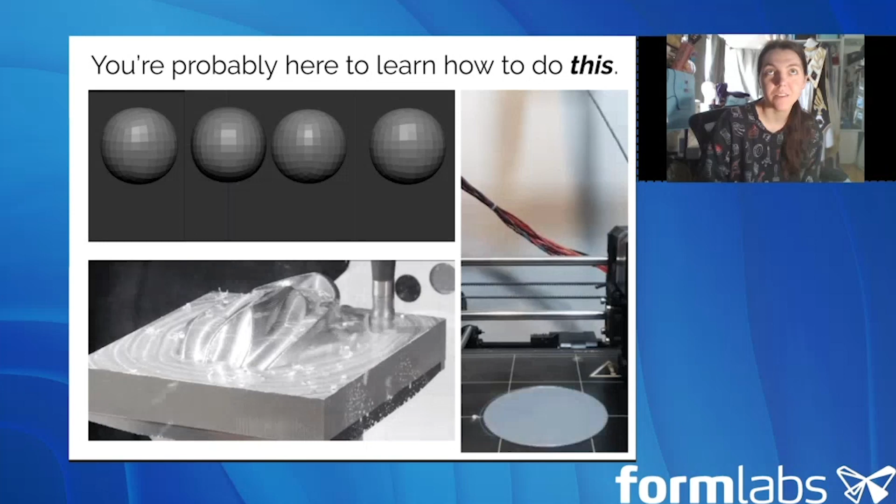So you're probably here listening to this talk because you want to learn to do this. You want to learn to make something from nothing, and in order to do that, you need to make a file before you can actually send it to your printer.

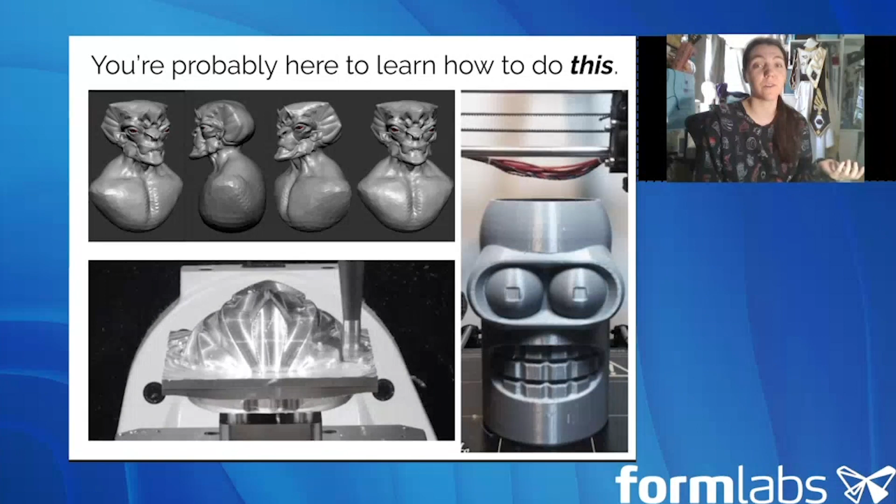You can also use 3D modeling for other things like CNCing, which is why I include that GIF on this slide, because learning to model is useful for a number of general construction applications.

Going through this presentation, we've pretty much done most of our intro. I will walk you through the pre-build preparation, what you need to consider, and for example in my costumes, how I consider wearability for my parts. We will go into breakdown and simplifying shapes, and if you're making something that you need to put on your body, or that needs to work in tandem with a human, say like medical device type things, how to scale that proportionately, at least for a rough first pass.

We'll address DFM and DFA, design for manufacturing and design for assembly, so making something that is greater than the sum of its parts. We will talk about the three main types of CAD, the key operations you can do in a parametric CAD program such as Fusion 360.

I will do a live demo. I say live because this is something that I've recorded in advance and will be narrating over, considering it was about 2.5 hours worth of modeling condensed into 5 minutes for your viewing pleasure.

And we'll wrap it up with just the long story short of, once again, how this is useful for you and your 3D printer. So a couple common definitions for you before we start.

CAD stands for Computer Aided Design, which is basically using a program to help you make a 3D model for an eventual product purpose.

CAM is Computer Aided Machining, which takes that model, writes a series of steps very similar to computer code that can tell a machine what movements it needs to actually make in order to do it. And then 3DP, if I use that abbreviation, is just short for 3D printing. There are a bunch of different kinds, such as FDM, fused deposition modeling, that's like the plastic extrusion you see in the GIF going.

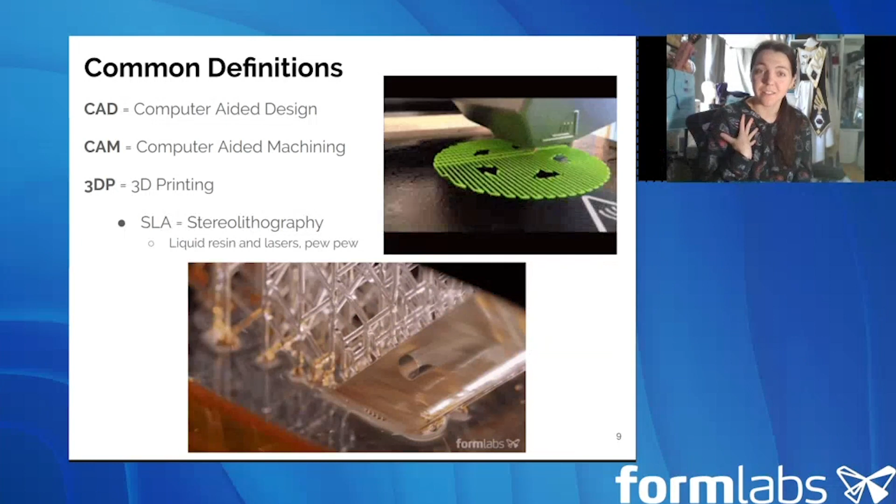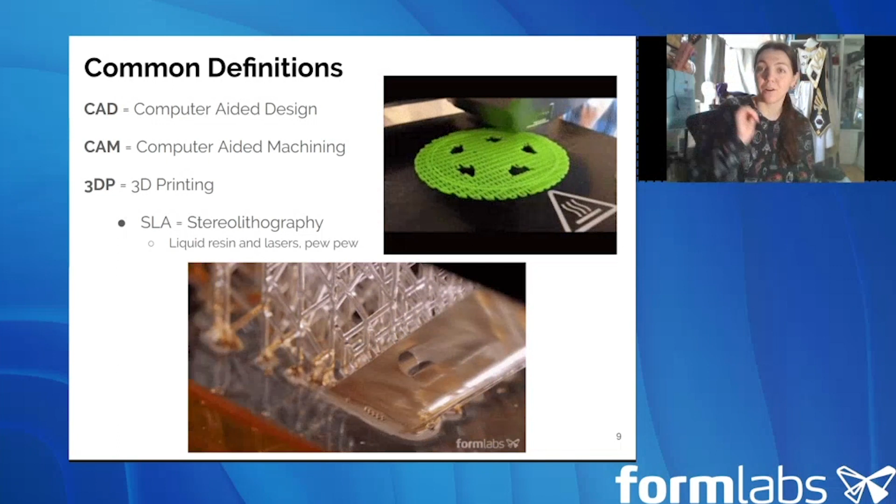If you are familiar with Formlabs, what we do is SLA, where we fire a laser selectively into a vat of resin. It cures, solidifies those particular parts, raises out of the resin, lowers back down, and starts a new layer to build up your part. If you're more interested in understanding how SLA works, visit formlabs.com, there are great videos about how SLA functions. But what you need to do to make your model does not necessarily correlate directly to what the printer itself does on the inside. We make it easy, so all you need to do is load up your file and press go.

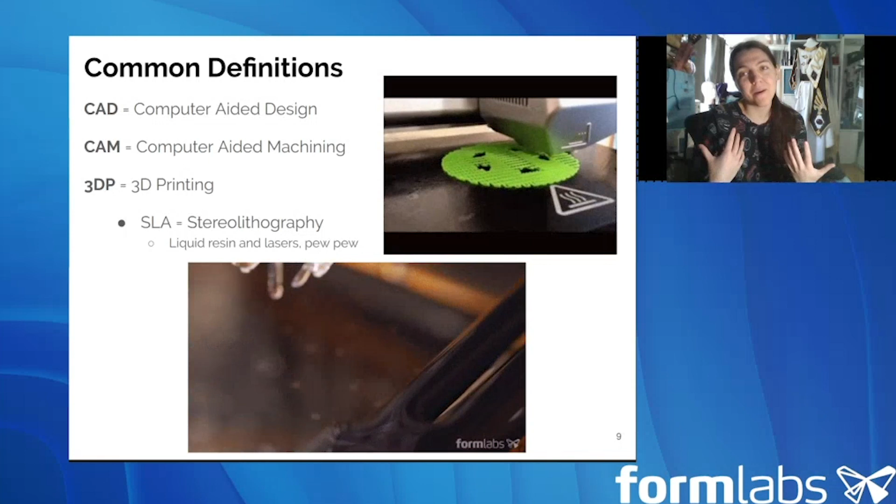To break it down, the first thing you need to do is plan out your design. When I approach costuming, I first collect a lot of references. If you're making something from scratch out of your brain, you'll approach this a little differently, but since I'm trying to do a replica, this is how I do it. I try to get as many views as humanly possible. If I can get 3D character models, concept art, that sort of thing, it's super helpful. I also really like getting animations of things I'm trying to recreate.

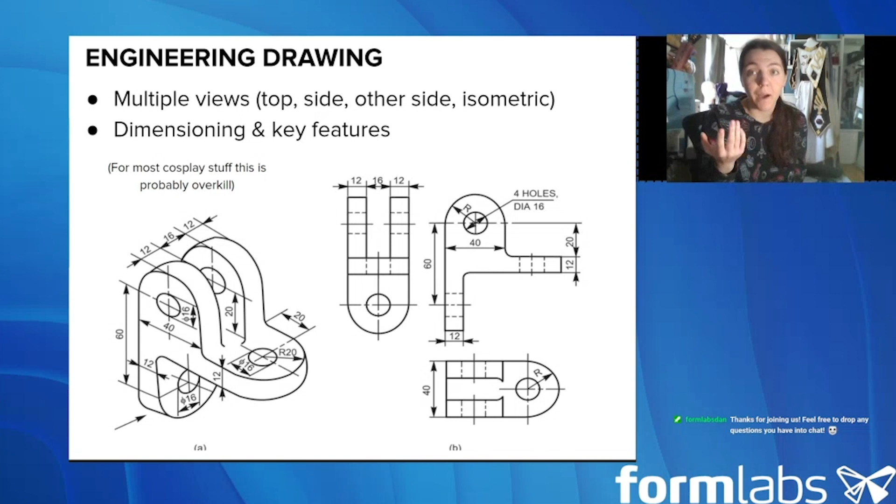Another thing I need to consider, particularly because I'm designing things that people need to wear and hold and look good with in photos compared to a human body, is scaling. I tend to do things like measuring myself and superimposing that onto artworks before I actually get to doing things.

Gridding that bad boy out and being able to scale it is really useful for getting a rough estimate of the size things should be, and that can help put it in perspective. When you're looking at it on a screen, it's very hard to get a sense of how large or small the piece you're actually making is without the ruler telling you. So knowing things like the width of my hand is roughly 4 inches, or that the circumference of my head is 24 inches, can be really helpful for putting designs in context for me personally.

Designing for humans in particular, I generally give this talk at costuming conventions, so I tend to say break things down into simpler shapes. Your wrists and your arms can be broken down into trapezoids, so here to here is a trapezoid that gets wider, whereas if you look at it from this view, my wrist is an oval, the upper part of my arm around the elbow is also an oval. I can basically say ovals, ovals, trapezoids, and combine that into doing my forearm.

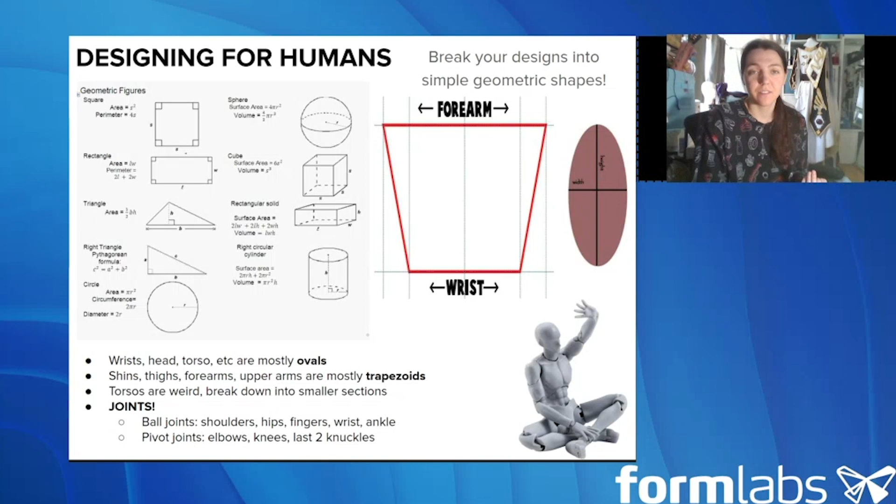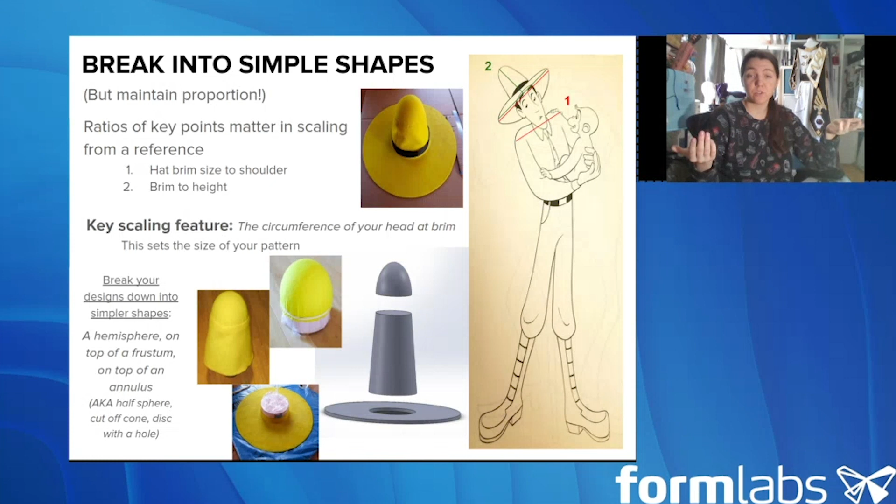Breaking it down into those three pieces made it really easy for Zach to cover this in fabric and then actually wear it.

A more complex example I'm working on is a prop from the game Kingdom Hearts, which we can also break down. Despite that weaponry looking weird and complicated, we can break it into simpler shapes. Starting at the handle, we've got an oval piece with a bar through it, where she's actually grabbing it. We've got two diamond pieces that seem to have holes cut through them, so I can call them overlapping squares in simple terms. I personally would approach them like an octahedron with the top cut off and a hole chunked through it, but that's more complicated than you need on the first pass.

I've got a square rod because I can see that ridge on the top, which tells me it's not round. Then I've got a smaller square rod with another octahedron piece in the middle, and a number of beveled and chamfered cutouts on the piece that's supposed to be the top of the key.

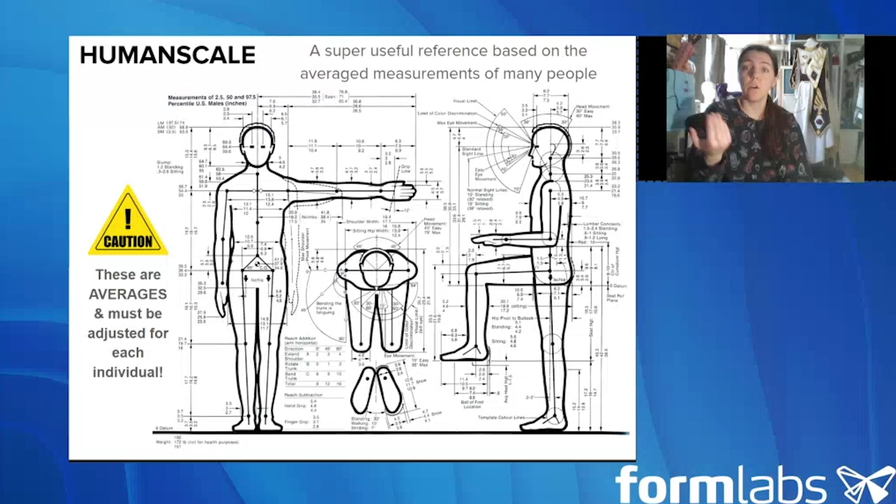Another useful reference, if you're doing something that needs to be human size, is Humanscale. This is a series of averages made by the US military based on soldiers. You can generally use this to get a frame of reference for approximately what sizes you need. This won't necessarily match your own body, but it's at least a good sanity check if you're sizing something that needs to work with a person.

If you don't understand what shapes you need, I like to harken back to a 3D drawing method popular in the costuming community, where you wrap yourself in saran wrap and then duct tape. It sounds silly, but that blue tape thing you see is a copy of my arm. Then I can draw on the pieces I need, cut them out of paper, put them back on my body, and make sure they work. So if you need to figure out how to make something flat go to 3D to understand the shapes, doing some kind of model like that—whether duct tape, saran wrap, or tinfoil—can be really useful.

Now we'll talk about DFM and DFA, which is design for manufacturing and design for assembly. If you're planning your build, you obviously need to start with pieces, but before you start making any one piece, you should sketch out every feature in 2D before you go into 3D. This is referred to as master modeling.

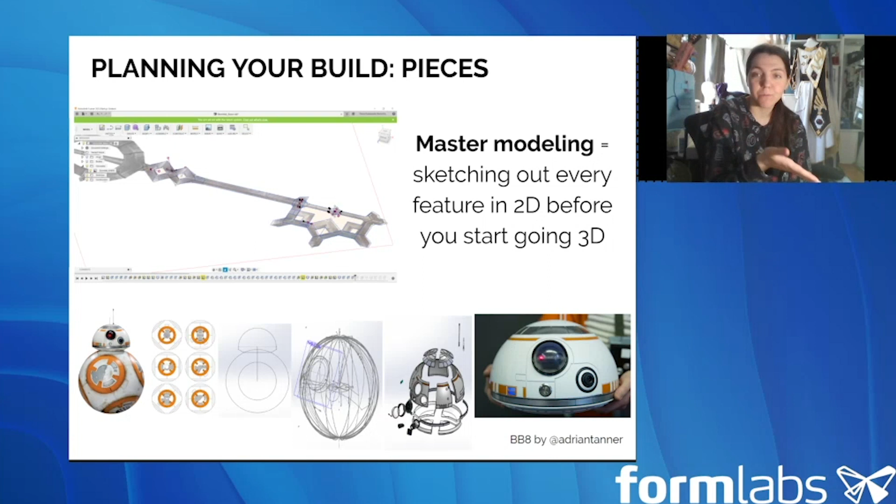We actually have a former intern named Adrian, goes by Adrian Tanner, who made the BB-8 you see on the bottom there. The side view is very simple—just a flattened half sphere for the head, and two spheres for the center, since he made BB-8 hollow. Very simple sketch, but he also drew out all the different views of BB-8's top and bottom piece to make sure the headpiece actually fit together with the bottom. Then he was able to easily chunk that out for 3D printing all the parts, and you get the super cool BB-8 head you see here.

Another thing to consider when building is to use off-the-shelf parts wherever you can. You don't necessarily need to 3D print a plain rod when a wooden dowel or a piece of PVC might do the job. Leave the printing for the more complicated parts that would be near impossible to hand sculpt, or that you couldn't produce cheaply or easily otherwise.

One example is a folding fan I made for one of my Dungeons & Dragons character costumes. If you look closely, the fastener I've got here is a simple eye bolt. The eye bolt lets me put a cord through it so I can put it on my belt, and the screw holds it in nice and tight. This solution was $1, as opposed to having to make something complicated to hold together all of these laser cut pieces.

That leads nicely into connections—how are you going to fit your parts together? I've got an example of a sword carved out of foam, which I put a core through, so you do need to consider mechanical strength. That's another reason to check the mechanical properties on the technical data sheets for whatever resin you might be using to print your parts. Use overlaps to hide your seams, screws, or other connections you don't need. You can hide permanent connections, but make sure you can access connections that need to be able to come apart and break down.

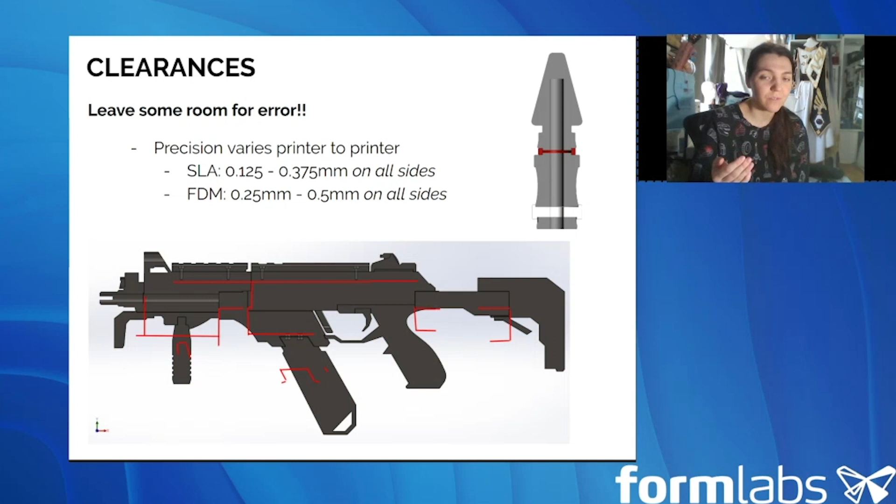I would rather have a part come out slightly undersized than slightly oversized, because there can be fractions of millimeters of variability in your printers. You need to make sure you can actually get those pieces together and attach them by glue, Bondo, or whatever you're using to combine them. You need space for that glue, and if you don't leave space for it, you're going to end up with two pieces that are oversized and don't actually fit together.

Another thing to look at is exploded views and assemblies. An assembly, if you're not familiar, is a series of parts that are put together. You can make a bunch of small parts and then put them together into one part that you can do a nice render out of, or an exploded view.

The wand I've got here on the side is from a show called Little Witch Academia. I've got my super nice, shiny, high gloss render that is what I want it to actually look like when I'm done painting this part. Just to the left, you can see an exploded view showing the top of the wand, the bar that connects it, the top and bottom end caps, and the grip. On the grip there are two little silver parts that aren't visible in the final render - those are the parts that actually slot together, which I will glue down when I finish, although I'll leave one end open with a screw so I can get batteries in there and make this thing light up.

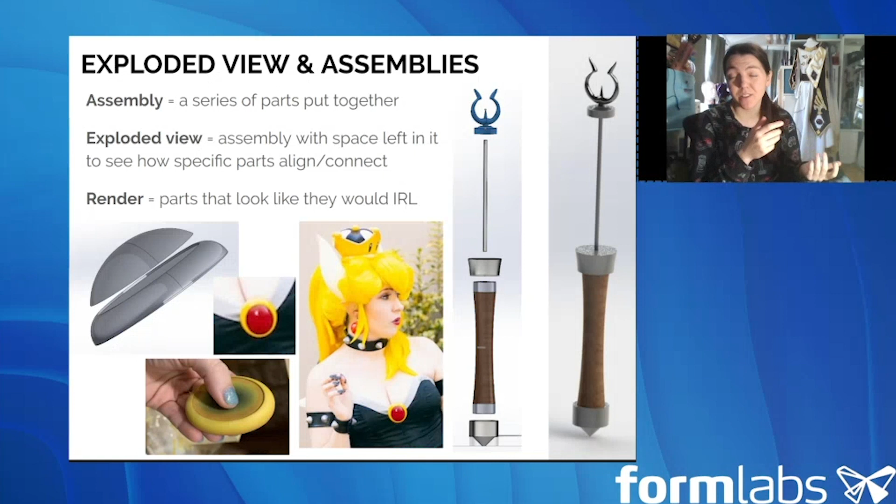I've also got a very simple example with the gem. There's a gem in the backing - that yellow piece painted on the bottom is the backing of the gem that ended up getting mounted on top of a corset piece.

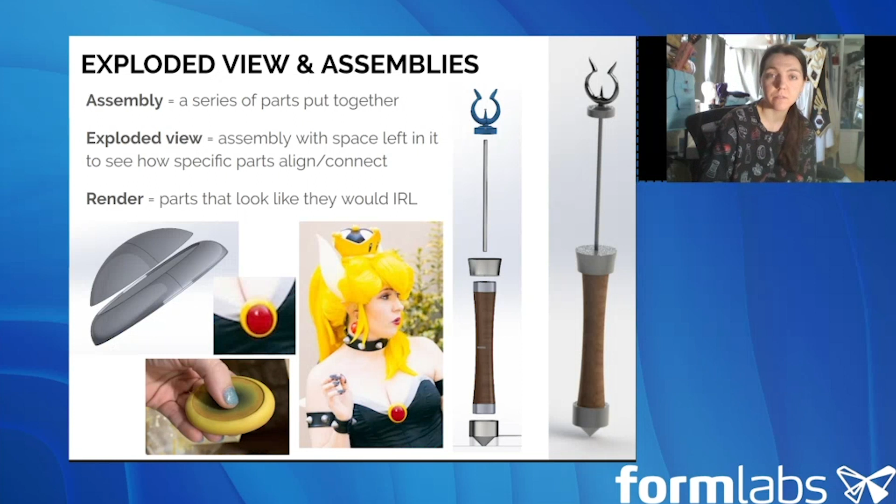There are a couple different types of CAD, and which one you'll want to use really depends on the application of what your final part will be. They are solid and surface modeling, which is often also referred to as parametric modeling. There is mesh modeling, where you manipulate a mesh to get a final shape, and there's also virtual clay. I'll break those down for you right now.

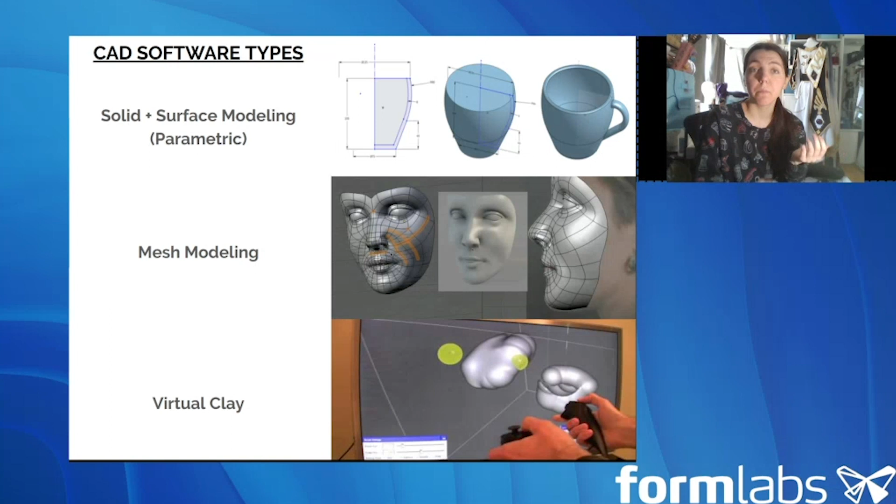Solid modeling - we'll go through a list of programs as well, for example SolidWorks, Onshape, and Rhino 3D. They allow you to define very technical, precise shapes with a lot of dimensions that you can actually measure out and mark on your model. They're really good for mechanical models and machine-like props in my case, but for doing machinery in general, this is probably what you want to be using.

A couple examples of things I've done in parametric programs are the Sheikah Slate from Legend of Zelda: Breath of the Wild. That part needed electronics components in it, a screen that lit up and glowed, so being able to dimension that out and make sure my LEDs all fit was very important for the printing and design process. The Bayard, the weird curvy horseshoe-looking thing, is the weapon from the Voltron show, matching with that white armor I posted earlier.

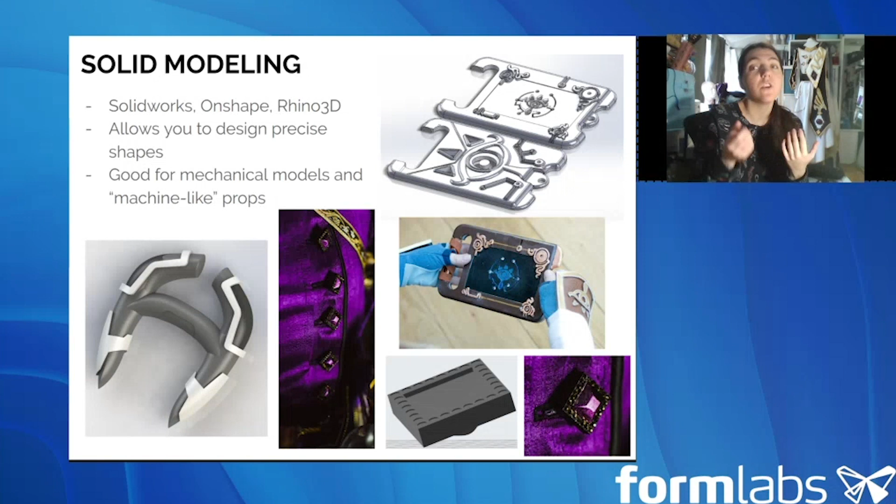Just because I say it's mechanical and machine-like doesn't necessarily mean it has to be blocky. This is a very round shape, but it's still defined by dimensions and done in a parametric software. It's also really good for things you need to design that actually need to hold stresses and strains, for example the buttons on my coat. The black model is the base, and then I inset a series of purple and gold gems into it, hence all the cavities. I needed those cavities to fit gems I already had that came in a set size, so I could dimension that out in the model, print it, and know it would be a perfect fit every single time.

Surface modeling is related to solid modeling. It's on the computer - it's joined surfaces that are practically the same as a solid. I'll use my Girl Scout cookie box here as an example of that.

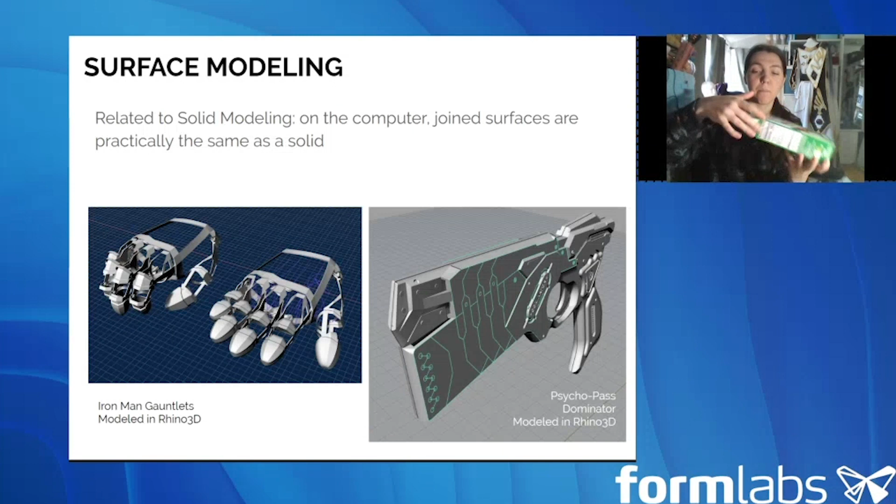This is a flat piece of cardboard. I've got all my tabs that are flat pieces of cardboard. When they join together, I get a single flat surface.

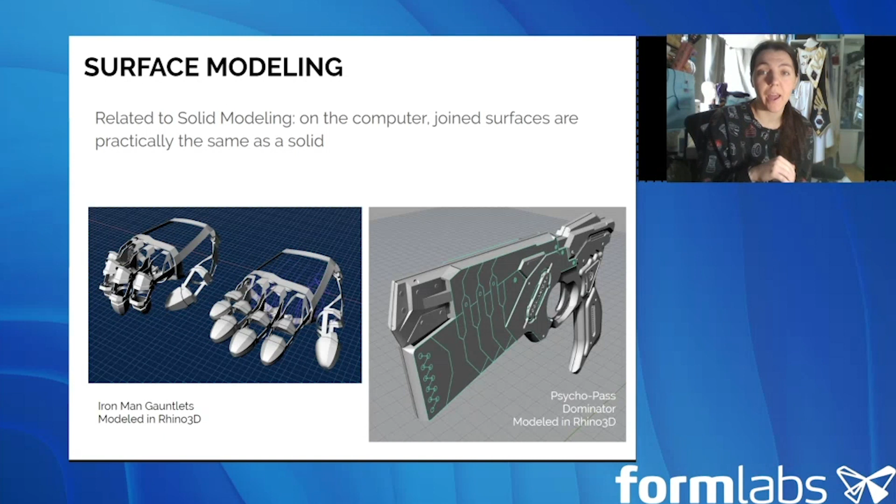The examples I've got here for this one are modeled by Brian Shannon, who was another Formlabs employee working on our design teams. These are his Iron Man gauntlets and also a pistol from the show Psycho-Pass.

Virtual clay is probably most like the normal sculpting that you're used to. So there's Sculptris and ZBrush as 2 examples. I recommend Sculptris for newbies who want to just play around and give it a shot because you can try that program for free. It is the least precise of the 3D modeling softwares because you don't really define any dimensions to a measurement, but you can do nice organic shapes as if you are actually working with clay in the world with your hands.

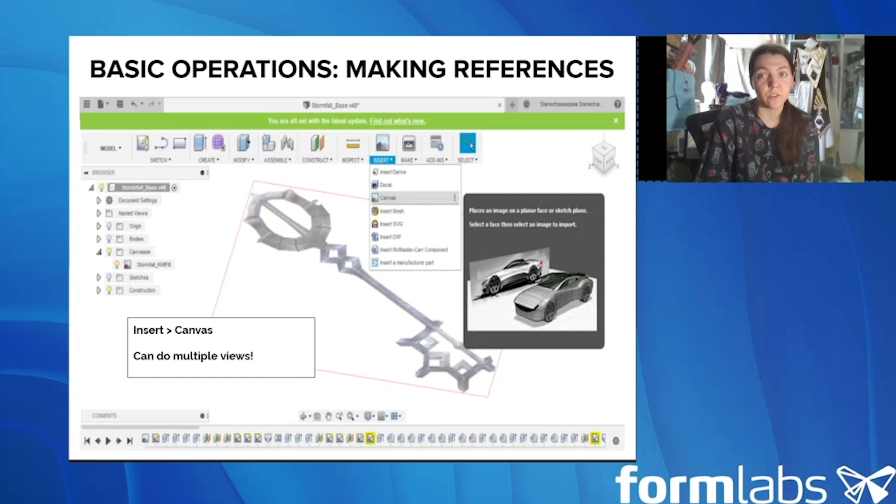An example of making references.

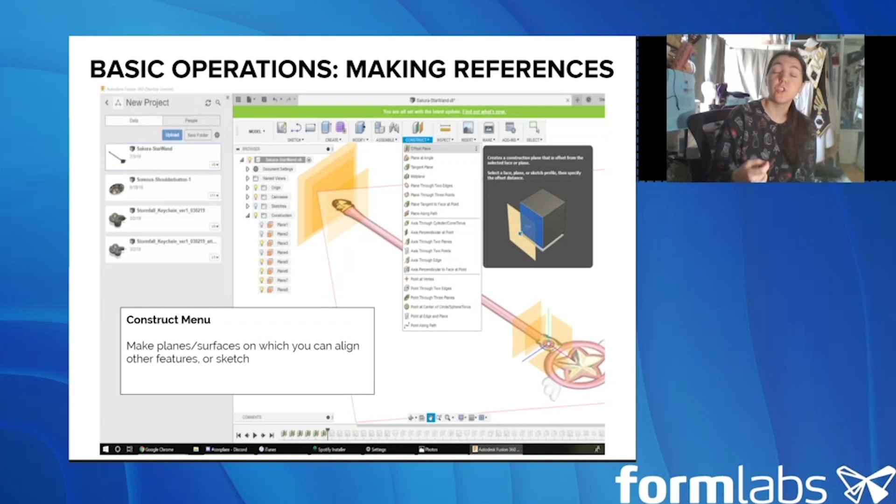Then what you have to do is construct. You need to start making the planes or surfaces on which you can align your other features or sketches. So in order to draw something, you need a piece of paper, and that's what I like to liken the planes in any CAD software to. You need to define a plane, or define your sheet of paper, on which you can make the sketch or the lines that you're actually going to use to make something 3D.

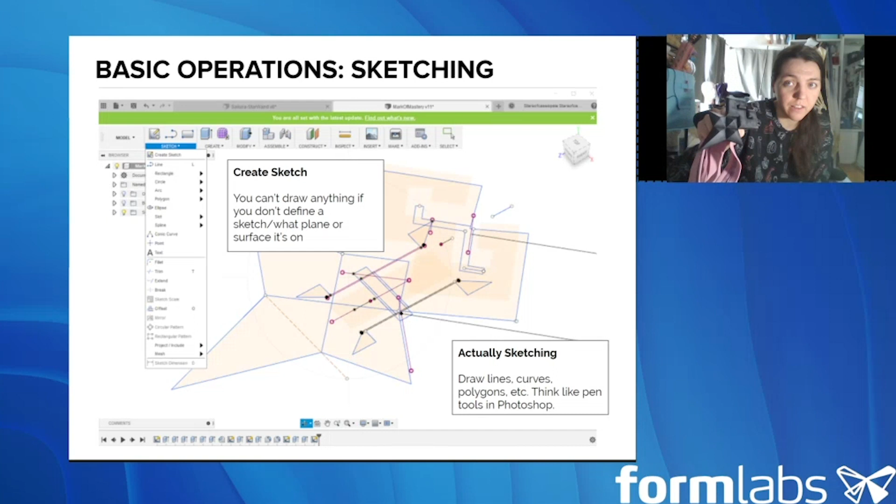Sketching is where you actually draw out those lines, so you go create sketch on whatever surface that you've chosen as your drawing plane, and then you can actually draw out the lines. So the sketch you see on screen here is the basic outline of those straps that I showed earlier. That sketch is what this piece looks like, laid out roughly like this, before I made any of this 3D.

Basic operations. Now that you've got your sketch, you can actually start making this something solid. The first thing you can do is extruding. It's like a prism. You start with one face and extend it straight up into an actual shape. So that part is this top piece here.

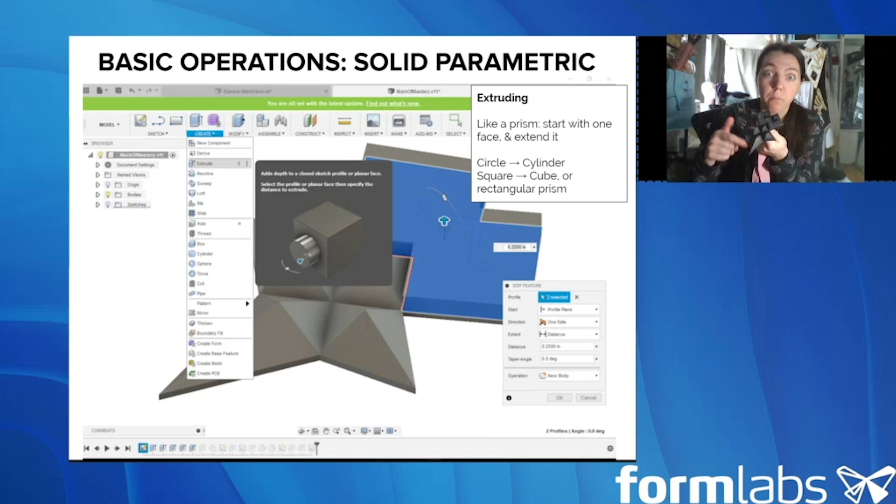You can also extrude things at angles, which is how I got these more pyramidal shapes on the bottom part of the Mark of Mastery. So if you drag a circle sketch out, you'll get a cylinder. If you drag a square, you'll get a cube or rectangular prism, depending on how high you make that piece.

There's also revolving, which is taking a shape and revolving it around an axis. Something like my water bottle is a really good example of that. I can sketch out this curve right here, revolve it around a center axis, and get something that is perfectly symmetrical.

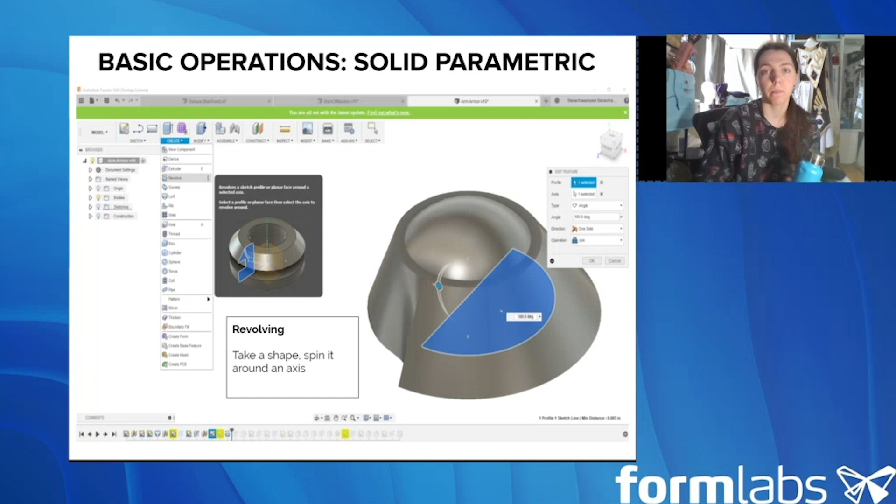There's also a method called lofting, and I really like the example that Fusion gives you in their hover-over. Another nice thing I like about Fusion for beginners is that when you hover over the actions in the menu itself, it'll give you an example of what that looks like.

Lofting is where you take a shape and extrude it up to another shape. The shape I've got here is actually part of the same armor set that this piece was from. It's a weird swervy bit on the bottom that comes up to a simple disc where a gem gets mounted on top. I did this as a loft because I have a complex shape that goes into a much simpler shape, and I want it all to taper nicely.

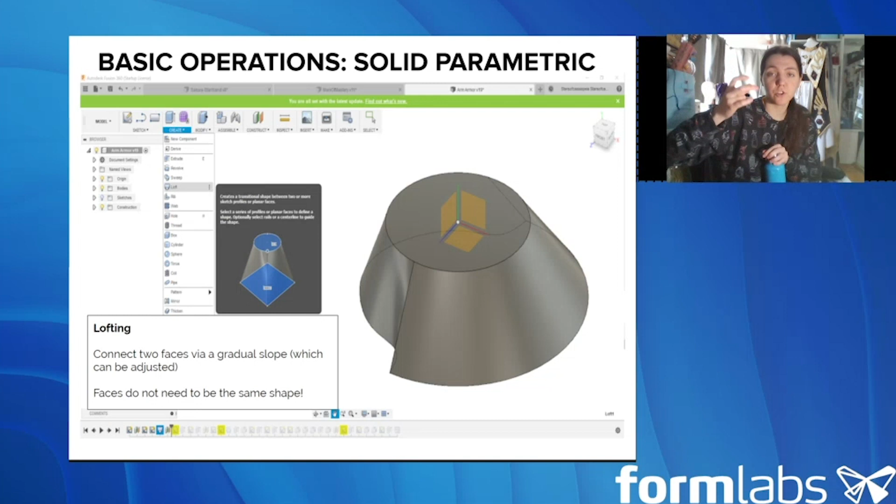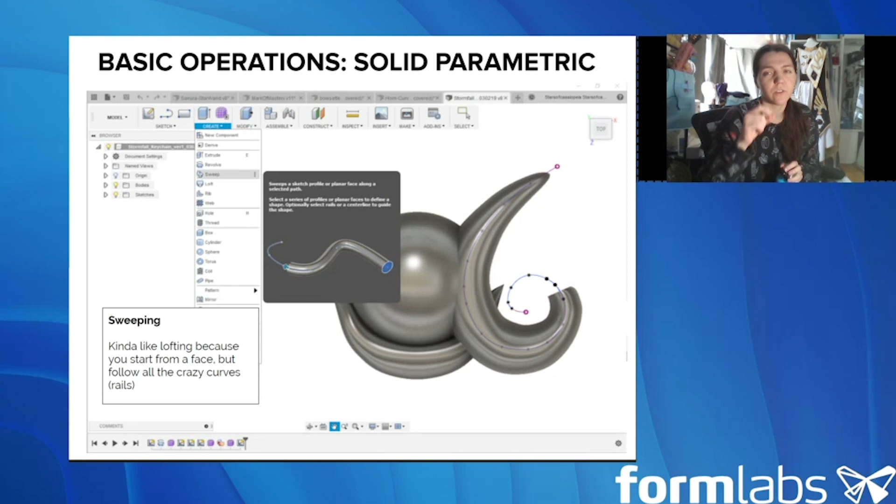Another option you've got is called sweeping, which is where you draw a curve and then drag a shape along that curve. That's how I started with the spiral part of the side of that piece. I had a circular curve that I dragged along that spiral, and you can get basically a tube that bends and wiggles and does all kinds of meandering. But you can also do this with a square, so you can get like a square pipe as well. Pipe is a good way to think about it.

And then for Fusion, we've once again also got mesh. So mesh manipulations, you start with a block that only has a handful of faces. You manipulate the faces, the vertices, and the edges of this block in order to shape it into something more complicated.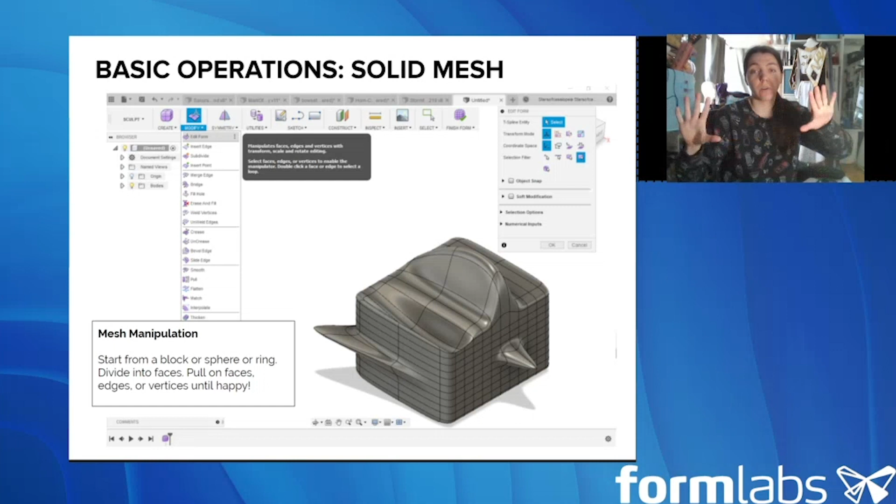Since all of the other mesh is defined as being flat until I start manipulating it, it's much easier to work big and then go down and refine into the tiny details when you're working with mesh in particular.

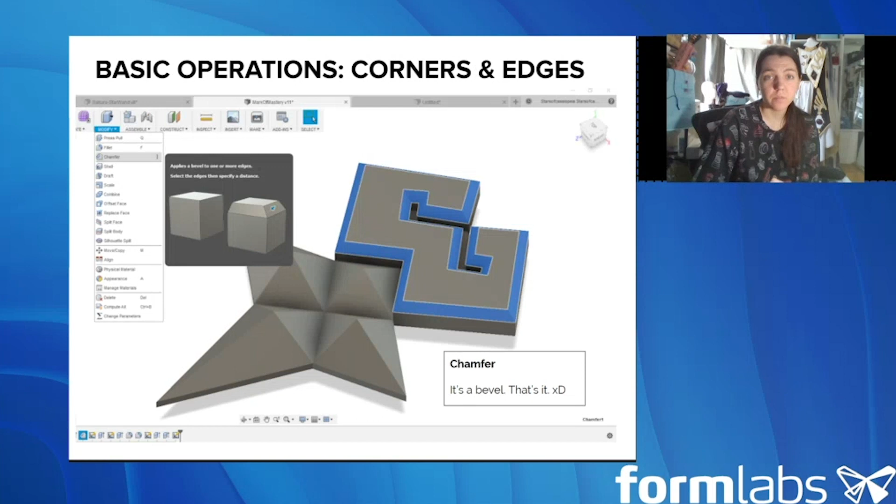Some other basic operations: corners and edges. The tool called chamfering makes a bevel, and that's pretty much it. You can see it really nicely on that piece — it gives a very nice finish on the edges of the top.

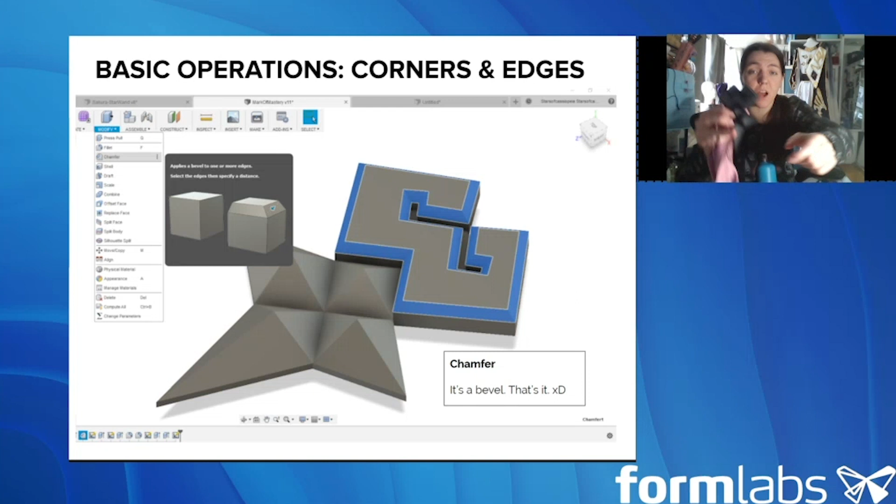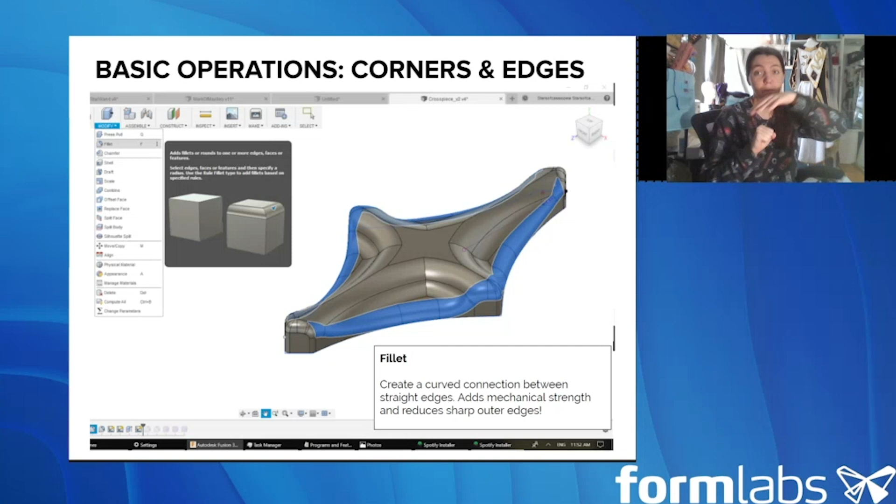You've also got an option called filleting. Filleting is basically like putting a curve between a 90-degree angle. I like to use the L of my thumb as a good example: when my fingers come together at a perpendicular right angle, that part of skin makes a nice little curve and smooths things out. It also adds mechanical strength to parts that may just be blocks stacked on top of each other, which can be really useful for printing and also making sure things fit.

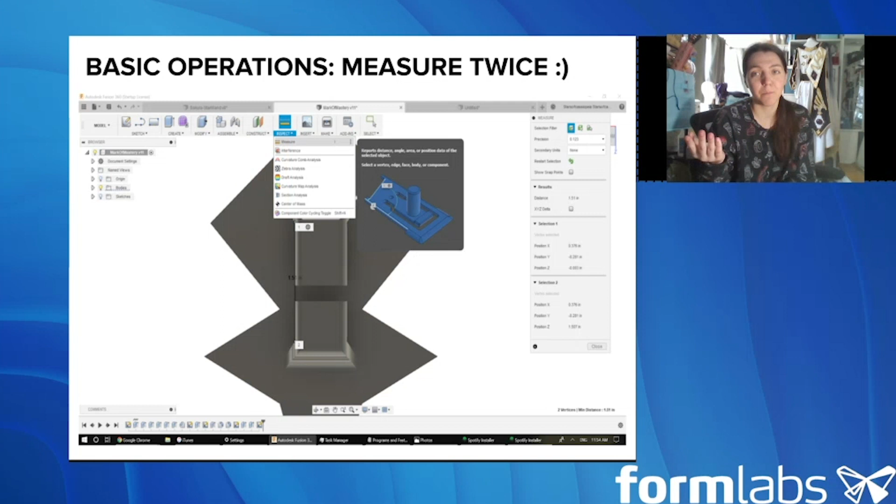Other basic operations: always measure when you're doing things. For me in particular, because I often deal with things that need to be human-scaled pieces, you can use the ruler tool to double check your measurements of any of your parts before you go and print something, and hopefully don't get the wrong size by doing your checks.

So the live demo I'll be doing is from one of my favorite cartoons as a kid, Cardcaptor Sakura, and the magic wand that she uses to fight all of the magical entities that appear in her world.

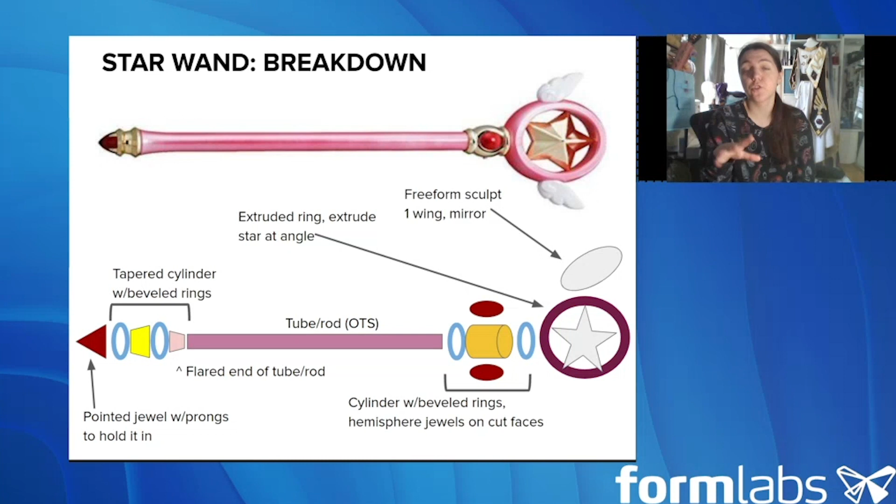Cool, so now we will play the demo of the Star Wand. This is at 10 times speed from what I modeled. It was about a 2.5 hour modeling process when I did it from scratch, and I would also like to say this is a fairly messy model because I was trying to do it for speed. I have a couple things that I will talk about, like where I would improve this if I was doing something really, really particular. But to mock up something quick, you can get something relatively fast that might look way more complicated than it actually is.

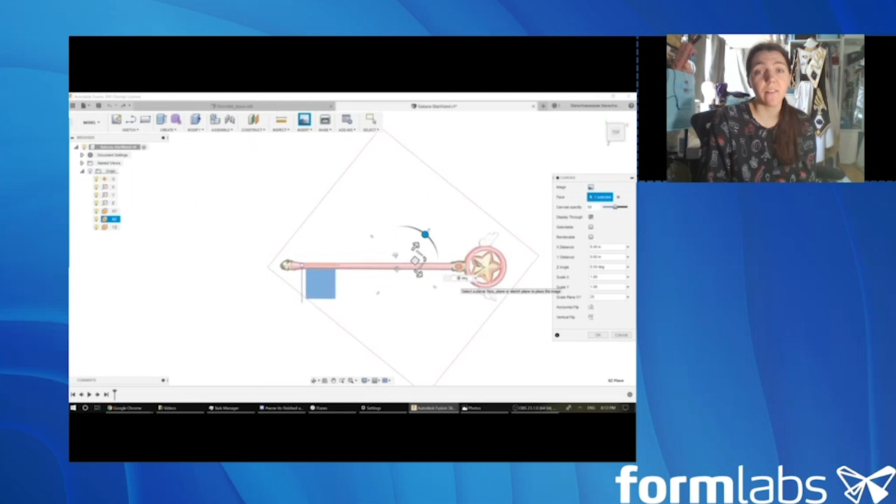So let's get the screen video going. Cool, so here we are starting out in Fusion 360. I am starting out by putting in my reference image, which I am then scaling to be actually my size, and I've spent a lot of time also trying to align it with the origin point that Fusion predefines for you.

If you align it with that, then I can do things like make symmetry from the planes, and I only have to draw half of things. For example, I can draw 1 wing and just mirror it over the middle plane.

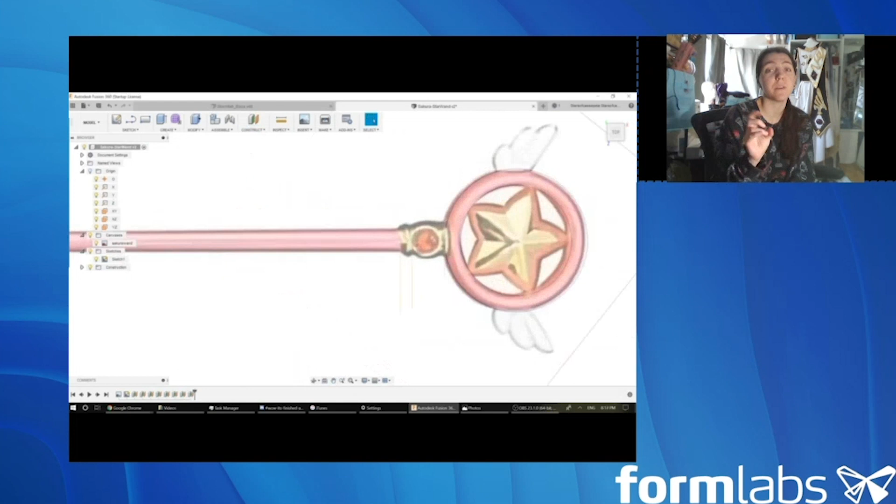What I'm doing right now is I am making those additional planes, so I'm defining where all of the tops and bottoms of those ring pieces need to be, where the flares start and stop on the handle, how all these pieces actually will fit together.

Right now I'm drawing these circles for the ring itself to make sure that it actually matches up with the prop. I'm a little bit off of the exact reference, but I wanted something that was going to look proportionally nice, so I generally tend to give myself a little bit of creative freedom when I'm drawing that out there.

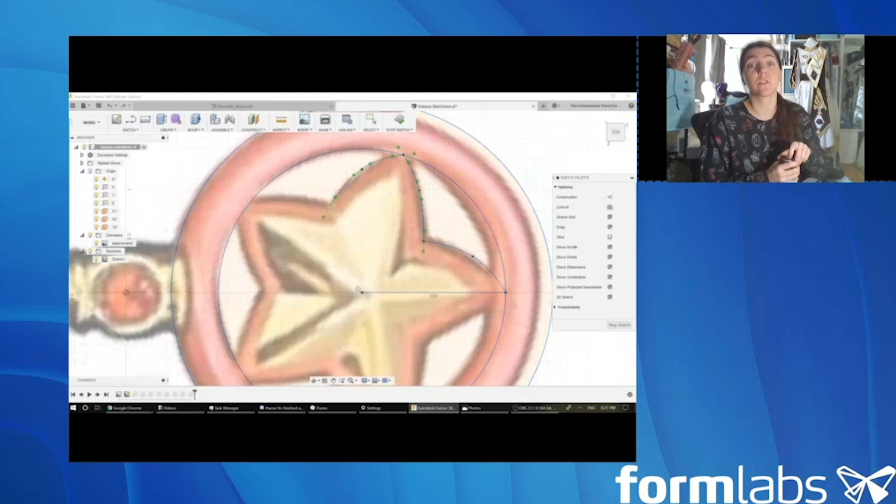What I'm doing right now is I'm drawing the curves for the star. I actually, in retrospect, this is one of the parts that I would have changed. This is quick and dirty because I wanted to show you how to use the actual freeform sketch tool with splines. Splines are lines that you can manipulate by pulling on certain points. It's very similar to the pen tool in Photoshop.

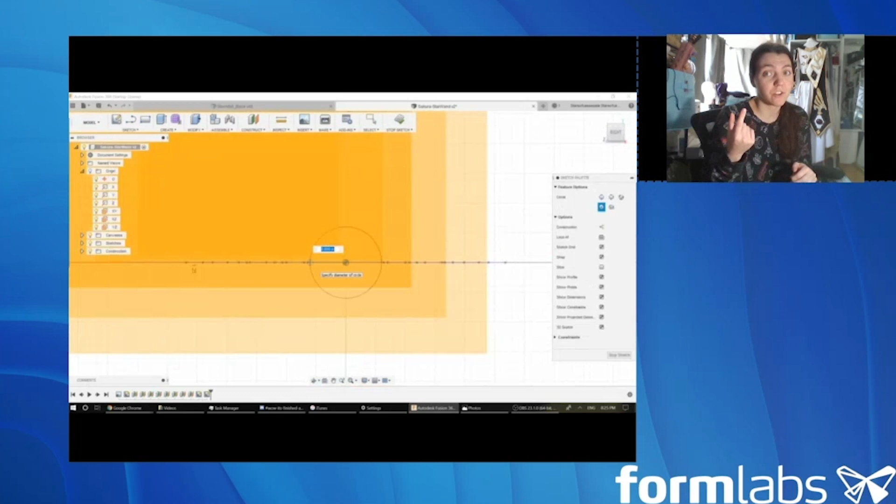What I would have done if I could redo this model is I would probably just draw 1 point and then use a symmetric rotation to make sure my 5 points were identical. So that part will look a little bit off in this sketch, but like I said, I wanted to show off how to use splines in the sketch where I really wouldn't get to do much of that otherwise.

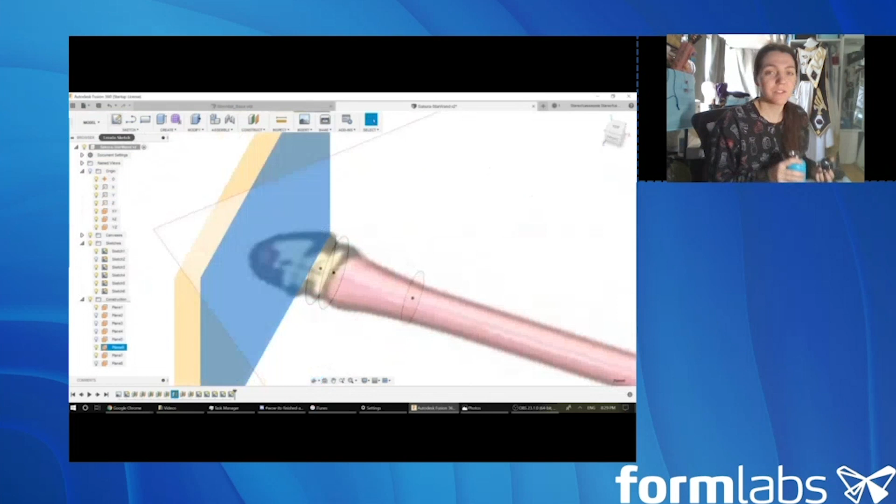So I'm back here defining my planes for the bottom of this prop. I'm drawing out my circles for the rod such that I can actually do things like lofts and extrusions to get them to all fit together. And we're just drawing a lot more planes and circles for a bit, so I'll grab a sip of water.

More planes, more circles. You spend a lot of time just defining your planes and your circles, defining your planes and your sketches before you ever get to actually making something in 3D. So this is our master modeling stage that I mentioned earlier. Lots more planes as we go, and I think we will soon start actually making things 3D.

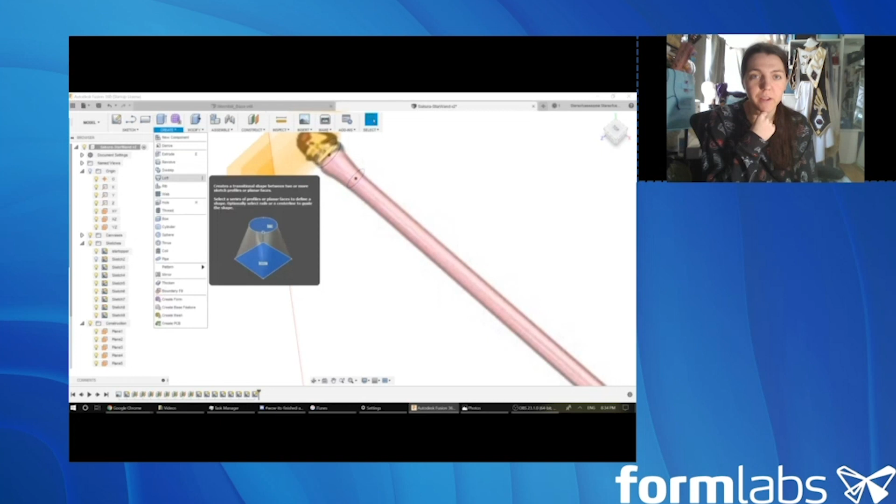Here we go. Yes, so this is an example of a loft where I'm doing that tapered part. So that's the bottom of the rod grip itself. Then I just extrude the rest of that tube up because it doesn't need to be anything fancy, it's just a plain cylinder. This is an extrusion of the top of the ring.

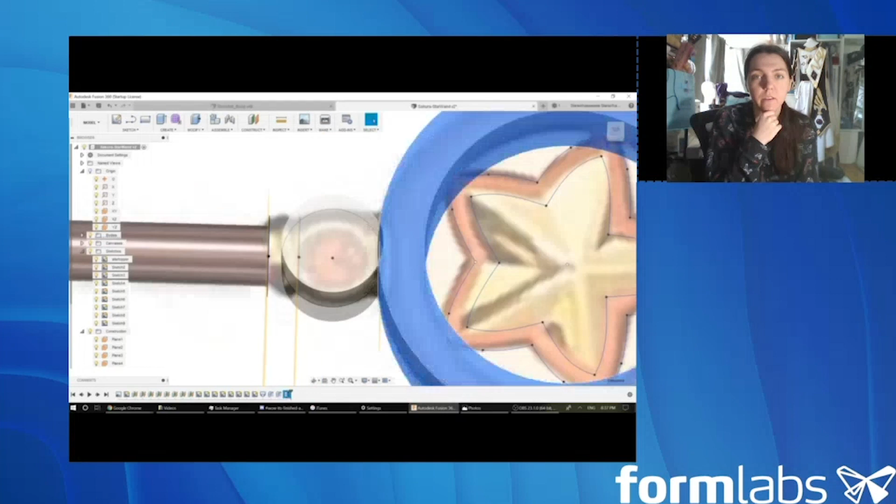I've also mirrored it over the bottom plane because the top and the bottom of the ring are the same, so I've just drawn the first half and drawn the second half in the other direction. Then I'm working on the grip portion, or the top connector grip portion of this. So I'm starting there to make that ring that needs to go out. You can see how I did that flare by extruding it at an angle. Did another one of those to line up with it.

Then I make sure that those pieces have actually connected together so that Fusion will treat it as one solid body when I go to print it, as opposed to a couple of different pieces that float. Because I will need to refine how those connections fit together, and if Fusion doesn't acknowledge them as one solid part, I won't be able to do that.

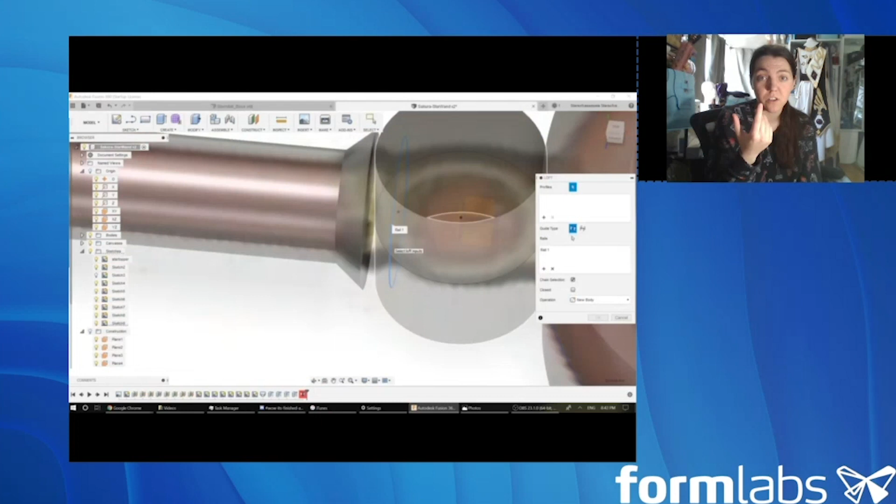There's our other beveled ring as it goes. Tweaking that connection to make sure it actually fits right.

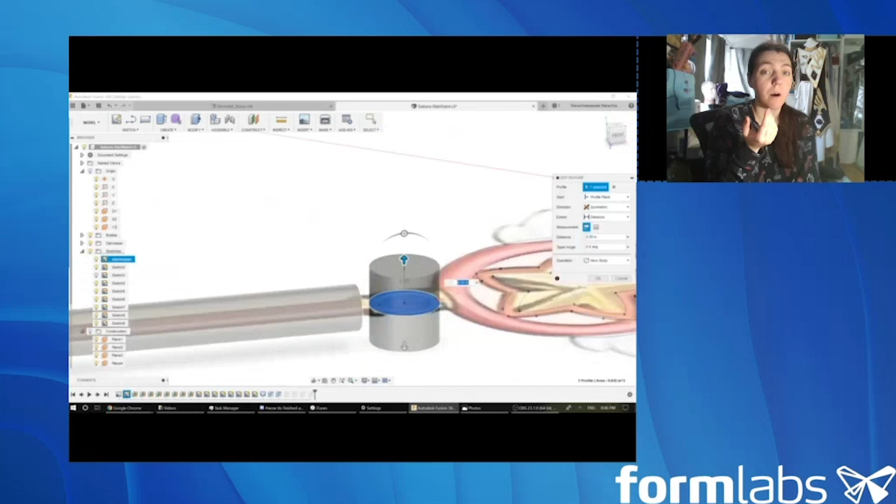Another thing I'll mention is that if I was actually designing this prop, I would probably make it collapse. This part is modeled entirely in one solid piece, but I would probably split it into a couple different pieces. I'd make that end cap, that little gem part we're working on right now, one piece. I'd make the rod grip another piece, and the top of the staff different, and have them either just fit together with a press fit, or some kind of screw point at that section, so I can disassemble it and put it in my suitcase and take it with me to whatever event I'm going to. But this prop is also fairly small, so I could just do it in one piece.

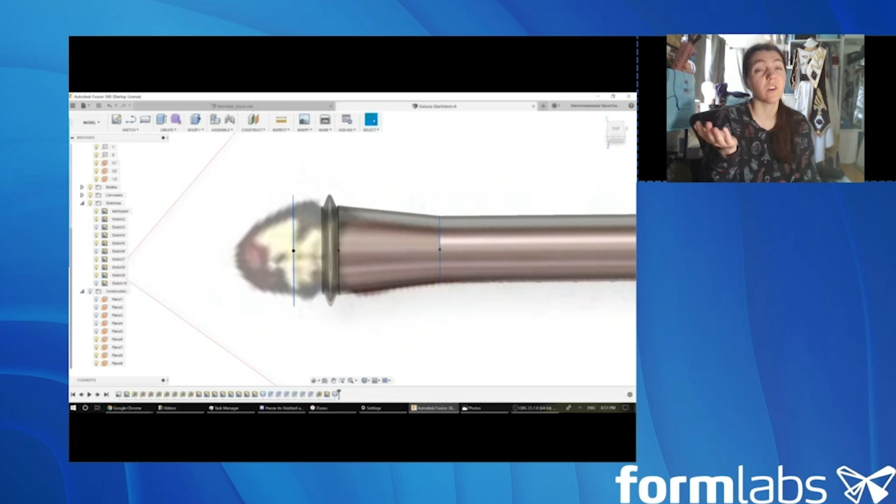What you'll need to do is break up your parts if you're doing particularly large parts, to fit inside your printer. If you're doing small stuff, it doesn't really apply to you. But knowing how to break things up to actually fit them in your printer is important. Like I said, this is where you do your sectioning off and do your tolerancing, such as what I mentioned earlier in the DFM and DFA portions of the slide.

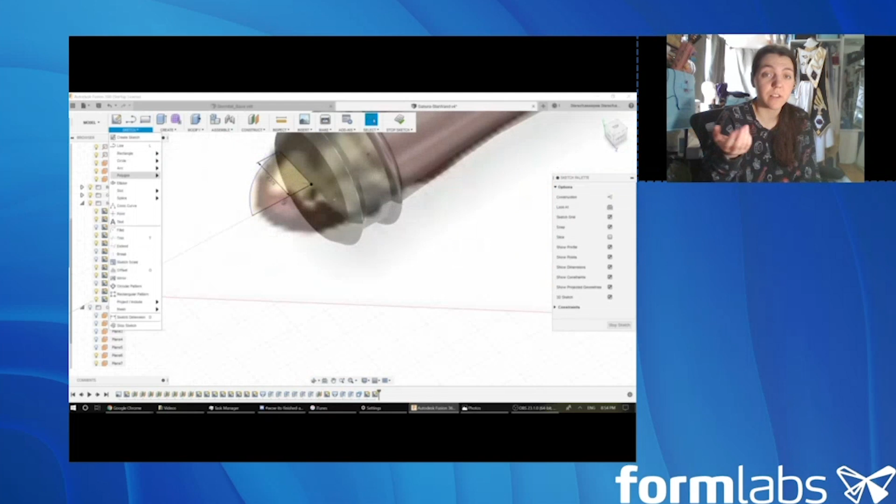This is an example of the revolve. I drew kind of just like a curvy part on roughly a quarter of a circle, more like a quarter of an oval, and then revolved it around to get that.

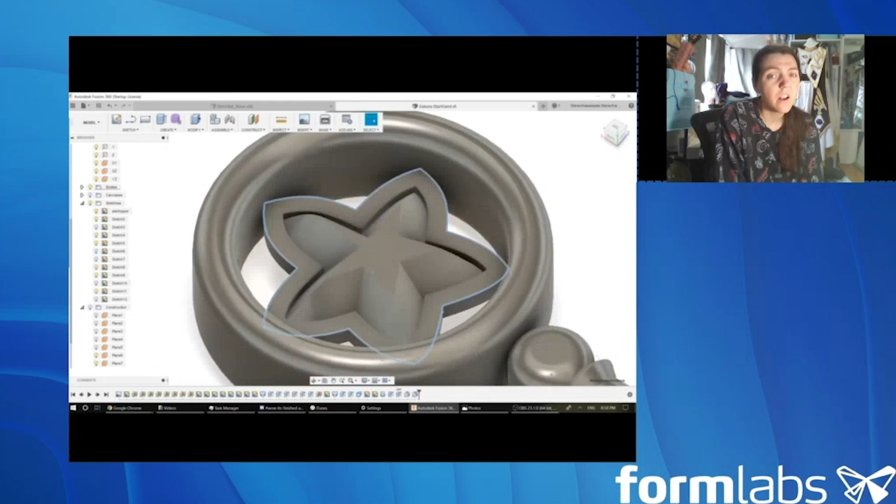That is our extrusion of the star. Like I said, it's not quite as neat as I would have liked, because I would have liked to do that with a symmetrical sketch as opposed to just the quick and dirty curvy bit I did here. That's one part I would refine if I was going back and doing this for real. And then I'm using the fillet tool here to smooth out a lot of those edges so they're not sharp and harsh. I want this to be rounded because Sakura is cute, and a lot of her props are not very sharp or harsh or rigid, so I wanted to make this a smoother, cuter part.

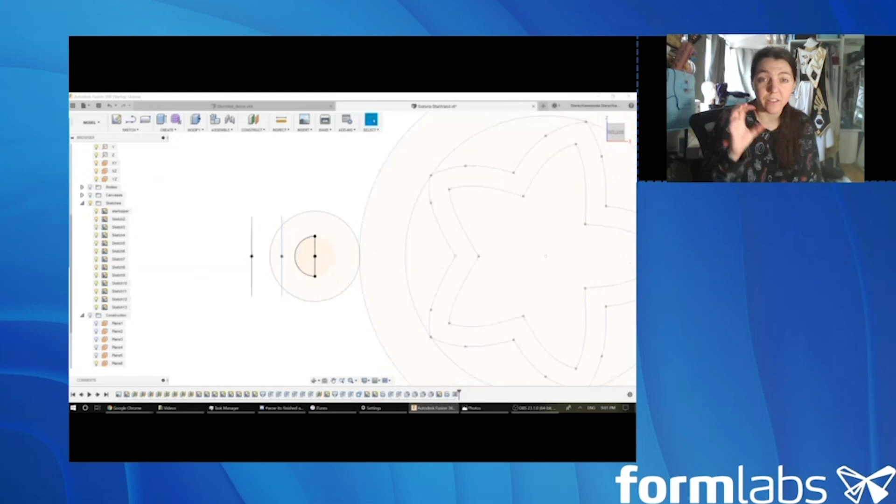That is another example of the revolve where I did the little red gem piece. That's a 180 revolve of a half circle, so it's just from here to here. Then I have to make that connection to make sure it actually connects up to the big ring itself. That's what I'm doing right now.

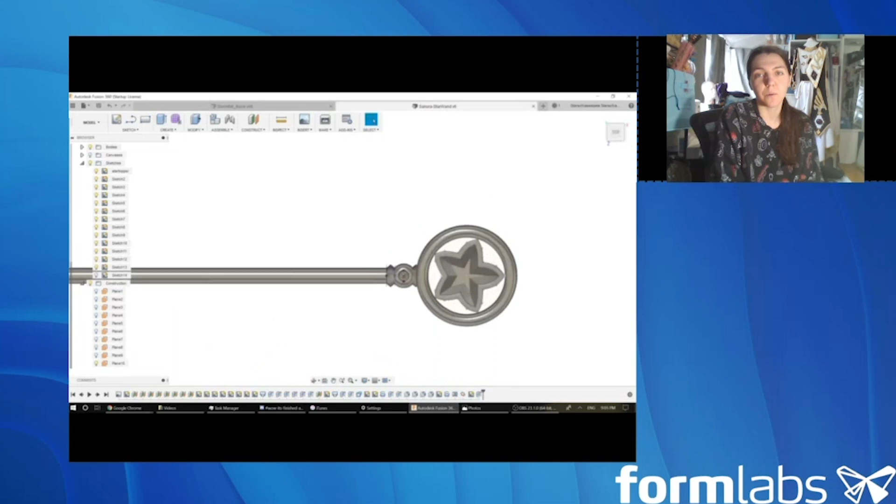There we go. Now we start off on the wings. I brought my reference image back, and then we are going to start working in a mesh for particulars. This is the spline tool once again, where I'm drawing out the outline of those wings.

Then I make an extrusion with the spline. You see I've got that overlap there. That's a problem, so I have to go back in and adjust it. Meshes are not happy generally when you've got lines that intersect each other.

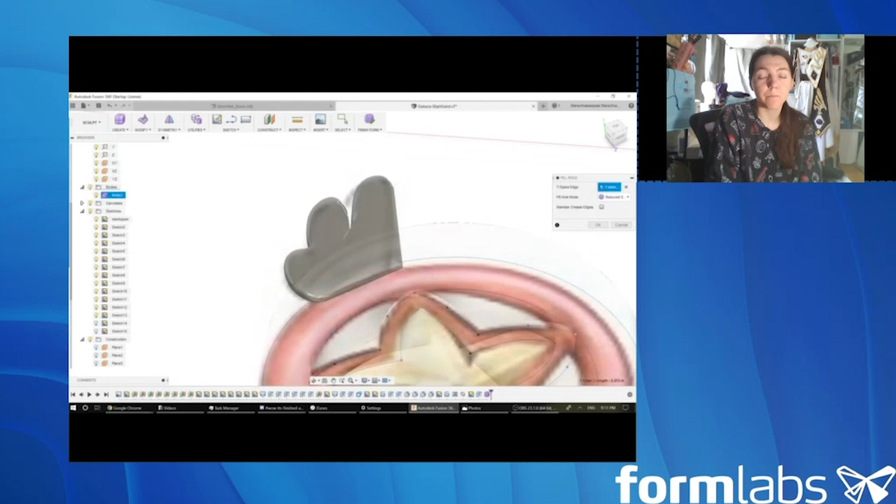So I've now made my wing border, which I fill in and start manipulating to get something that I'm happier with. What I wasn't a huge fan of is how that weird cut was happening because of the way the corner was aligning on the mesh.

So what I ended up doing, and you'll see that here in a second, is I split up the wings into 3 different sections: the tiny little bump, the middle bump, and the large bump, and then combined them such that the combination points weren't giving me bizarre, weird curves.

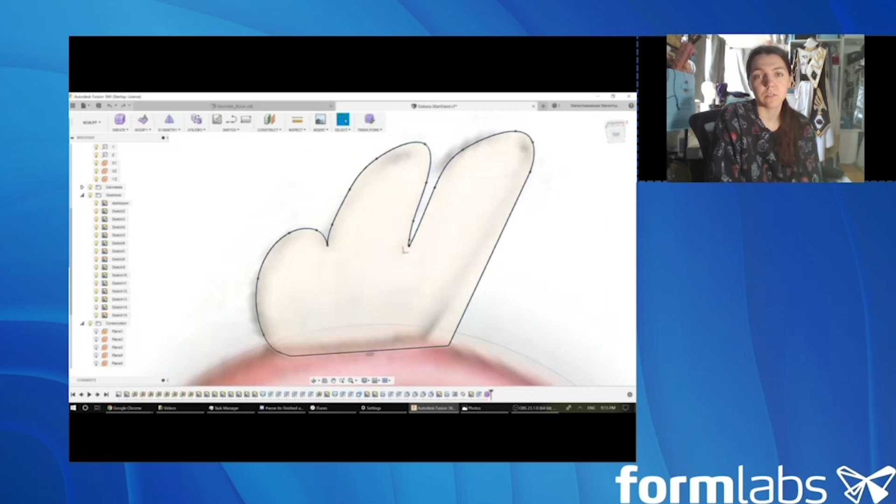So here you can see me, I've broken it into 3, and then I would just merge them, such that those connections can be a little bit sharper and cleaner.

That's where I start filling it in. I'm working with that middle piece. Then I'm working with that end piece. Then I'm working with the bigger one.

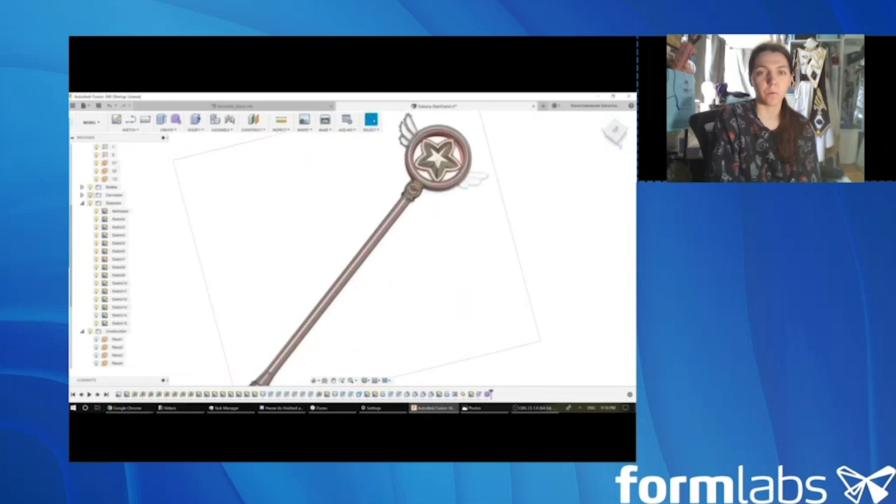I then proceeded to mirror that across to the other side. Once I had the top-bottom symmetry solved, then I mirrored it left-right.

And that pretty much gets us to the end of the video and what we have as our final prop.

So if you take anything away from this, what I would recommend is remember the following. First, when you're approaching making something complicated, you need to break it down to simpler pieces and shapes—define the main body, and then all of your smaller features as you work out.

What shapes are your holes? What size are your holes? Thinking about those types of things coming in, and even drawing dimensions, particularly if you need it to be something that's not as freeform, can help you think about it and make something that will work for you.

If you are making something that needs to fit with humans or other parts, use your reference images, use those other parts, use your body to give yourself an idea of how that part will actually be scaled, and then come out of your printer at the appropriate size.

Remember also that your parts aren't perfect no matter how good your printer is, so you need a tolerance, even if it's something like fractions of a millimeter, to make sure you can accommodate for whatever assembly method you're using, whether it's glue, Bondo, or whatever you're using to combine the pieces.

You also need to remember to use the right type of CAD for the job. If you're doing something more freeform or organic, a mesh model or virtual clay might be the way for you to go, but if you need something that has to be very defined and dimensional, that's where parametric is going to be way more useful to you.

And most importantly, CAD's fun. Have fun with it.